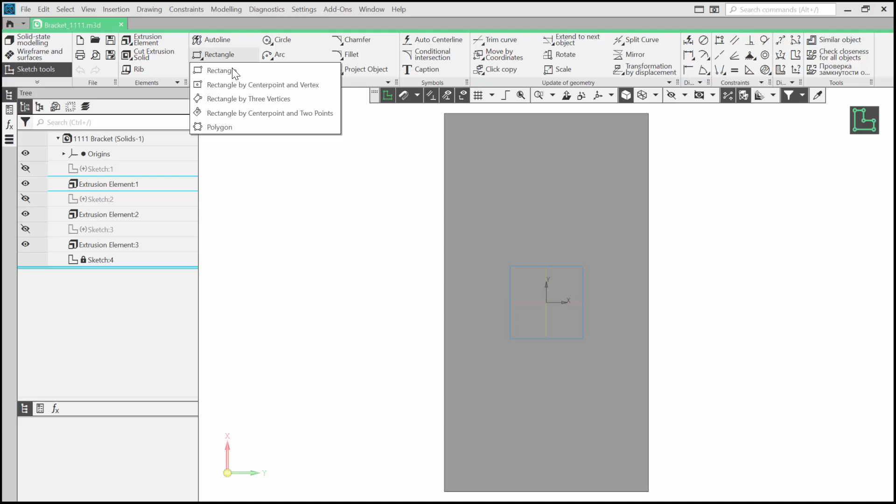First, create a rectangle with its center point at the origin of the current coordinate system. Stop the command. This rectangle is going to be an auxiliary geometry to help place the holes. The blue color of the rectangle sides indicates the normal line style. In KOMPAS-3D, this line style is used for base contours to create 3D elements. We don't need it for now.

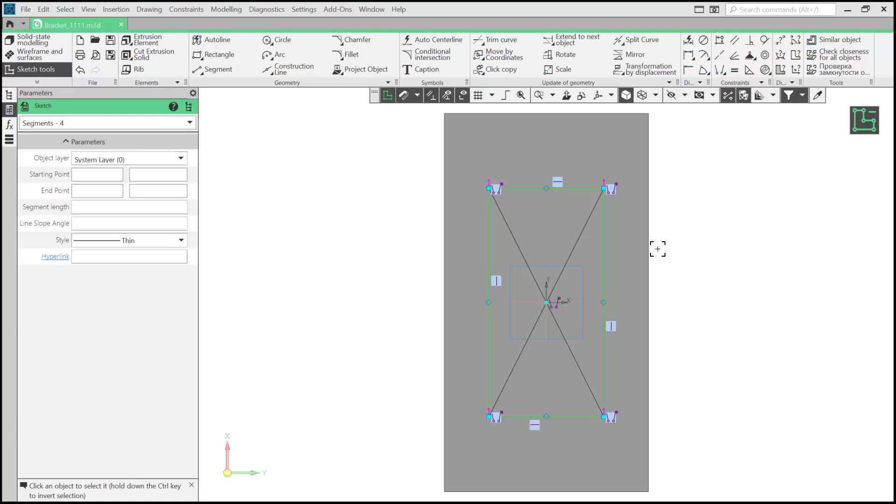Let's change the line style. Select all blue lines. Hold down the Control key and click all the blue lines one by one. Select Thin in the drop-down list. If the context menu disappears, right-click anywhere to open it. Press Escape to deselect. The blue lines have turned black.

Let's create circles with any diameter. Place the centers at the corners of the rectangle. It is important not to copy the circles. Copying will not create the necessary constraints between the circle centers and the rectangle vertices. We are going to use these circles to create the holes, so they need to be created using the normal blue line. Let's add diameter dimensions to the circles.

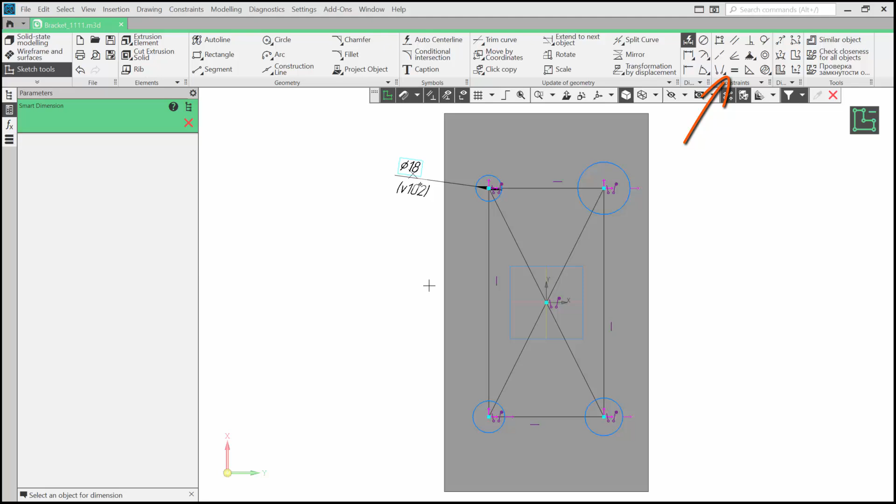You can use either the Smart Dimension command or the Diameter Dimension command. Let me use Smart Dimension. Type 18, press Enter. Since the other circles have the same diameter, it will not be very efficient to add diameter dimensions to each one. It's better to use the Equality command in the Constraints toolbar. Select all the circles using the Control key. Click Equality. Complete the command.

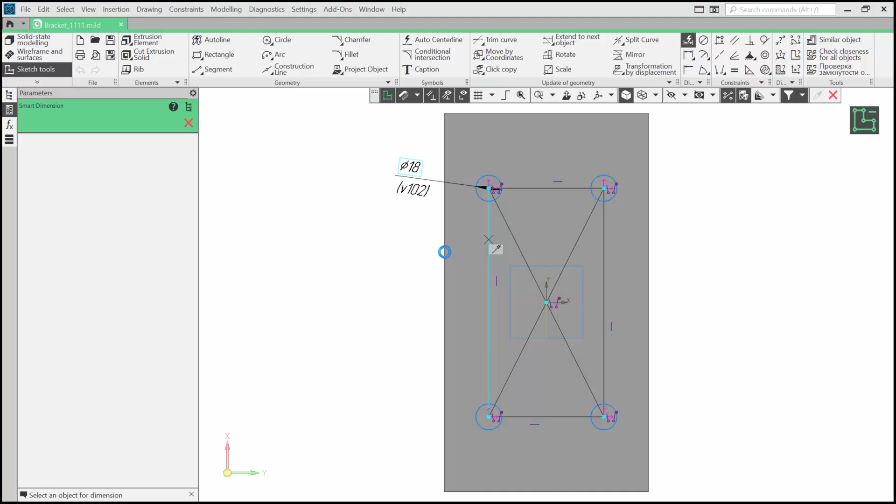If you try to change the diameter of one circle, all the others will change as well. It happens thanks to the equality constraints. Let me undo. Add the distance dimensions between the circle centers. The vertical is 200. The horizontal is 100. All lines in the sketch have turned dark green, indicating that the sketch is completely defined.

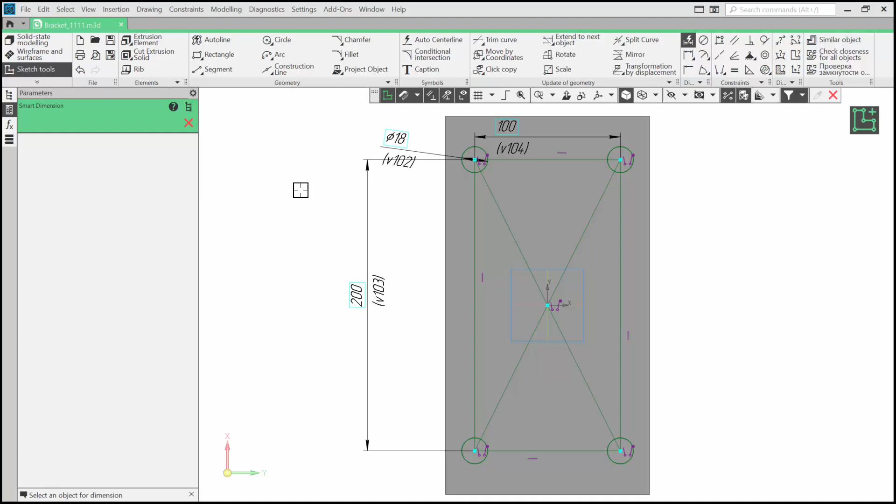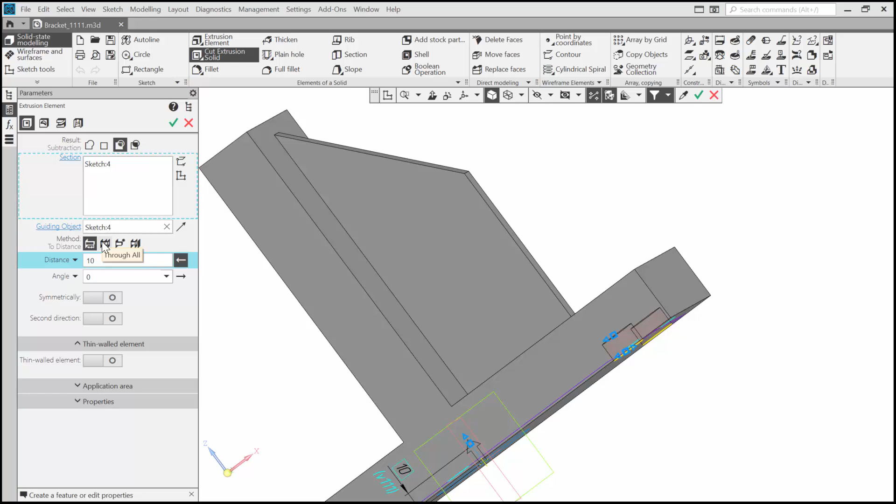It's time to add the holes. Click Cut by Extrusion. Let's rotate the model. Notice that the holes have not been extruded through the entire base. However, we need through holes. We can fix it by increasing the distance value. But let's use another way. Change the extrusion method. Select Through All. Confirm and stop the command. I use the mouse wheel and the Escape key for this.

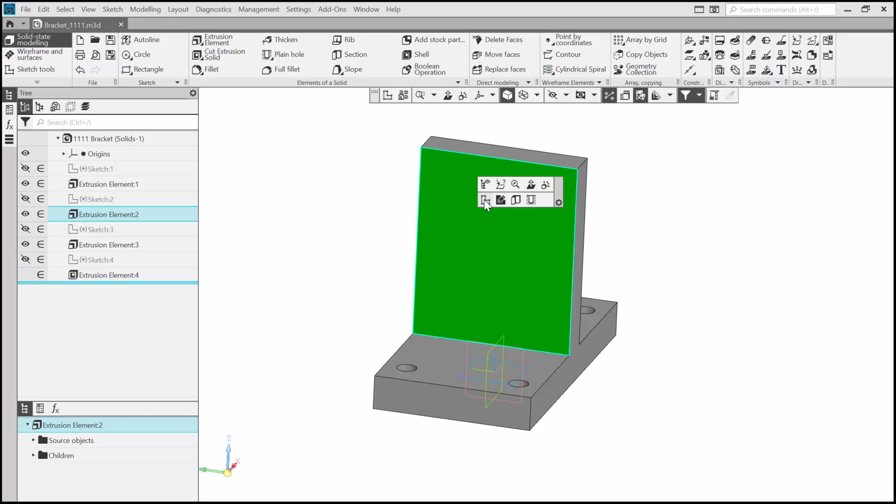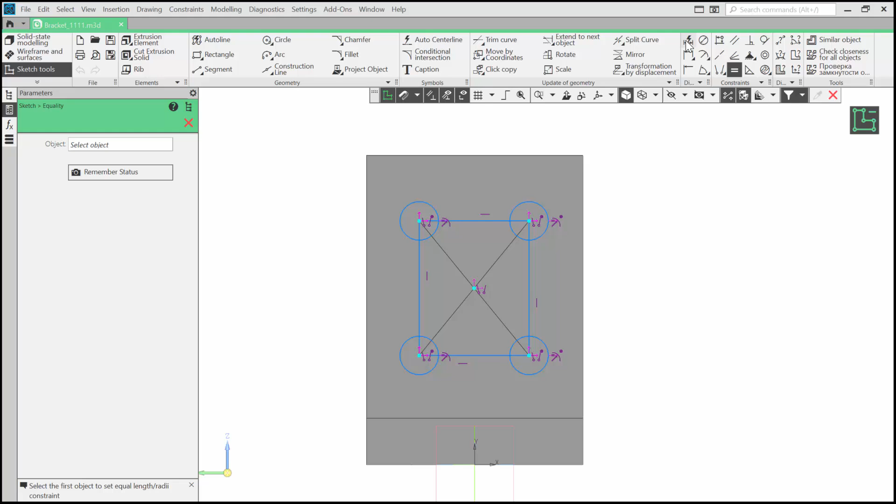Now let's select this face and create a sketch on it. Add a rectangle, like this one, and then, as before, create circles at each of the rectangle's corners. Complete the command. Let's apply some constraints. Select all the circles by holding down Control. Click Equality. And add a diameter dimension to any of the circles, for example, to this one. I press Ctrl to offset the dimension. Add the other dimensions.

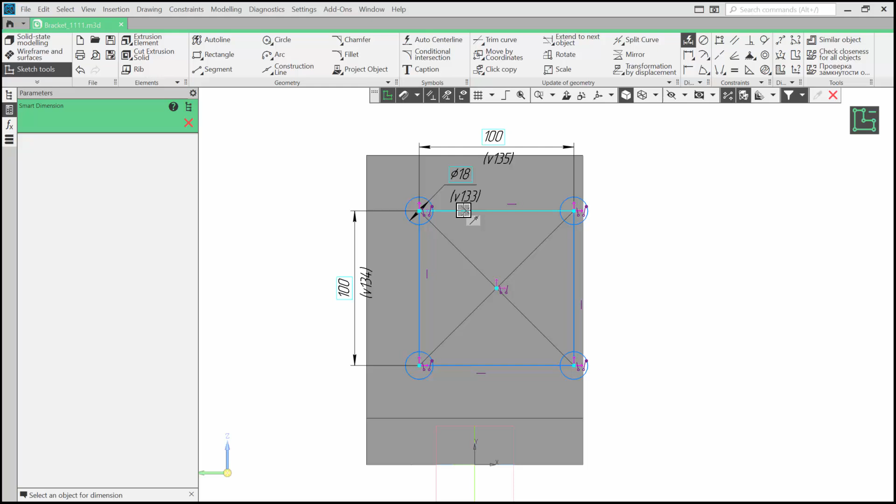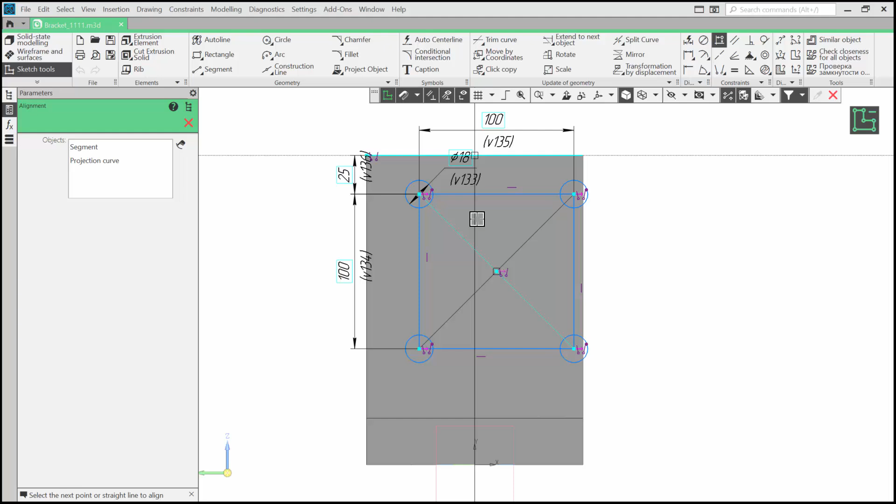Notice that the degrees of freedom disappear as you add the dimensions. However, we still have a few of them. To fix that, click the Alignment command in the Constraints toolbar. Select the rectangle center point. Then the midpoint of the top side of the rectangle. Follow the snap symbols to ensure that you are selecting the correct object. And finally, select the vertical line to align the selected objects along it. All lines have turned dark green.

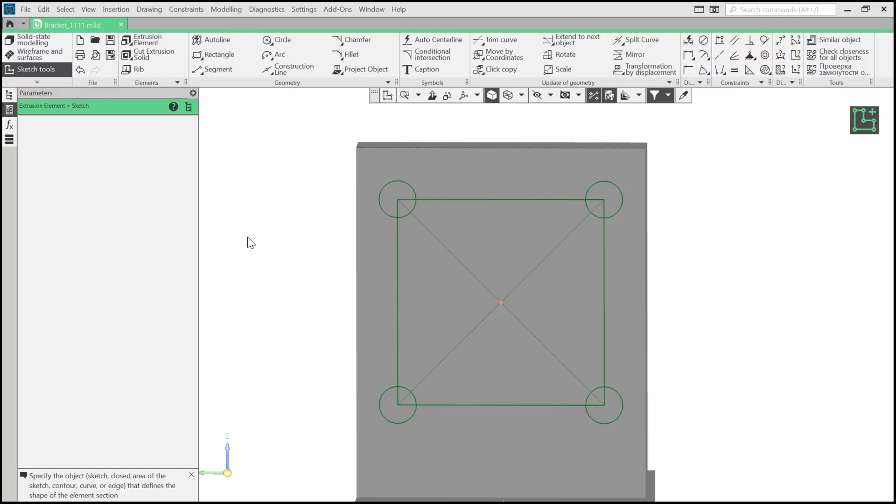If you try to extrude now, you will get a strange element. Let's fix that. Select our sketch in the section field. Click the pencil symbol to edit the sketch. This will take you back to the sketch mode. We need to change the style of the rectangle's lines. Let's use a new way to do it.

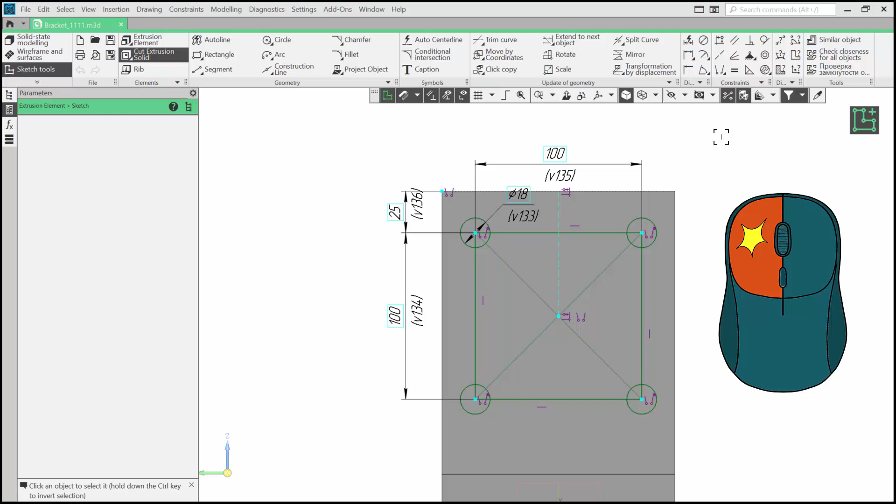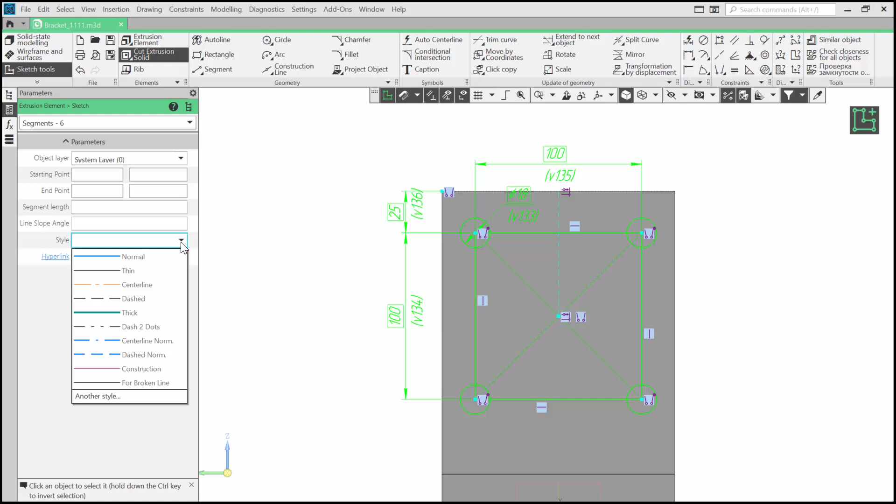Select all the objects with a marquee. Place the cursor at an empty place. Hold down the left mouse button and drag to select all the objects. In the parameter panel, select segments from the drop-down list. It shows that we have 6 segments. 2 of them are the rectangle's diagonals. That doesn't matter here. And then select the thin style. Deselect the objects to ensure that everything is OK.

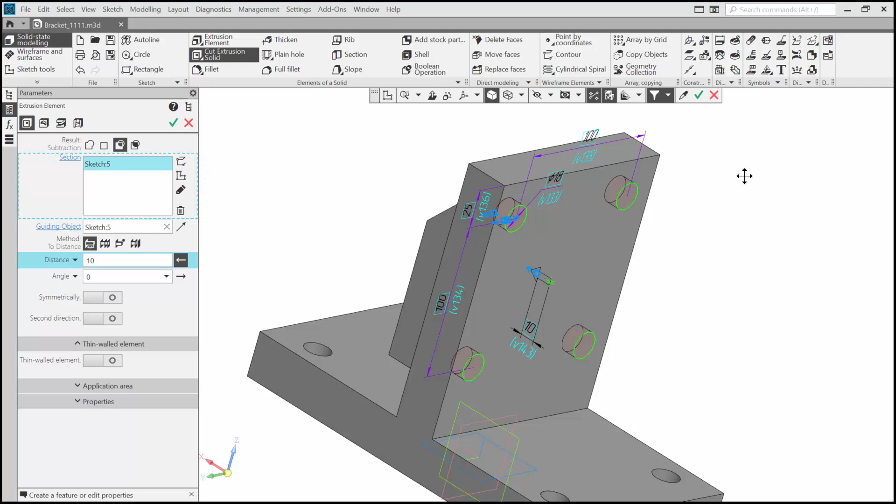Since we started editing the sketch from the cut by extrusion command, we need to exit the sketch mode. At that point, we will see a preview of the holes. Change the method to Through All. Confirm and stop the command. Click the yellow sphere in the center of the orientation element to set the view to isometric orientation.